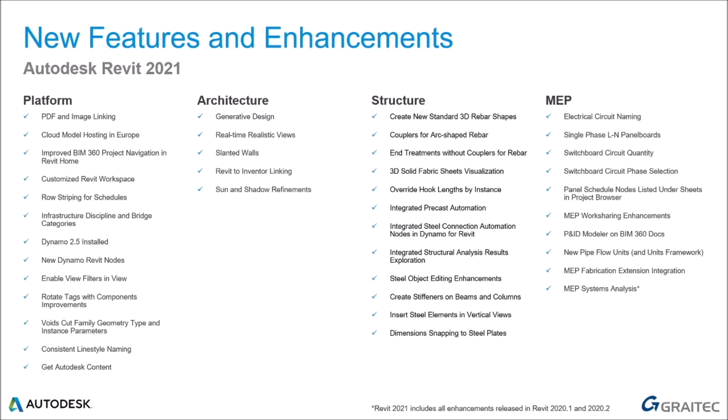Okay, let's get on with the main event. We have quite a list of improvements with Revit 2021, from the basic Revit platform to improve work across all sectors, through to industry-specific enhancements and new features for architects, structural engineers, and MEP engineers alike. Okay, let's take a deeper look.

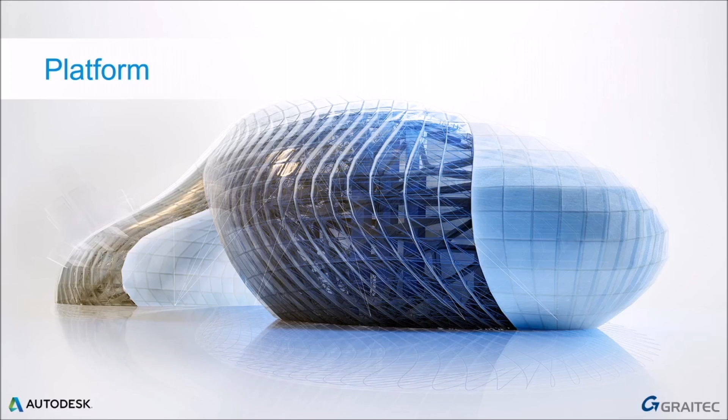First up, the Revit platform itself. What changes are going to be happening across the board that's going to help all of the different sectors?

For starters, we have much better PDF and image linking. We can now link and load images and PDFs in project models locally and from the cloud. Easily keep this information updated while not increasing the file size or embedding the image or PDF file for security or IP reasons. This feature improves sorting, adds size reporting, adds multi-select for unloading, reloading, remove operations, adds the ability to convert links to imports, and adds a show button to find a PDF or image in your model. Bottom line: you can utilize and manage images and PDFs much more easily in Revit 2021 with these new linking features.

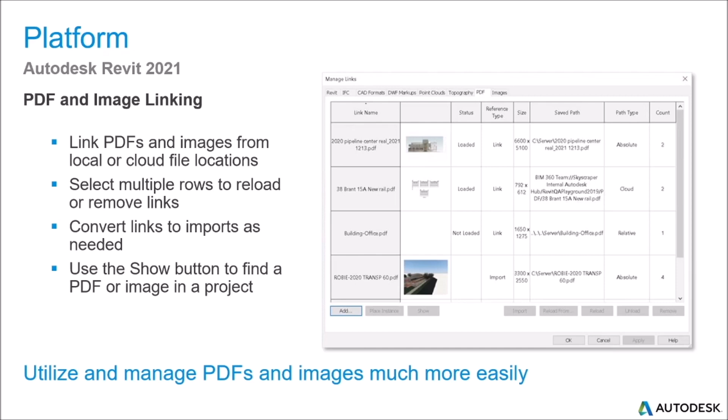For many of us, there's been an issue where a lot of the BIM 360 hosting has been in America versus Europe, but now we've got cloud models that can be hosted successfully in the European data center. This applies to work-shared cloud models using Revit Cloud Worksharing, and non-work-shared cloud models using cloud models simply for Revit itself. So now we have more choice in where our cloud hosted projects are actually stored.

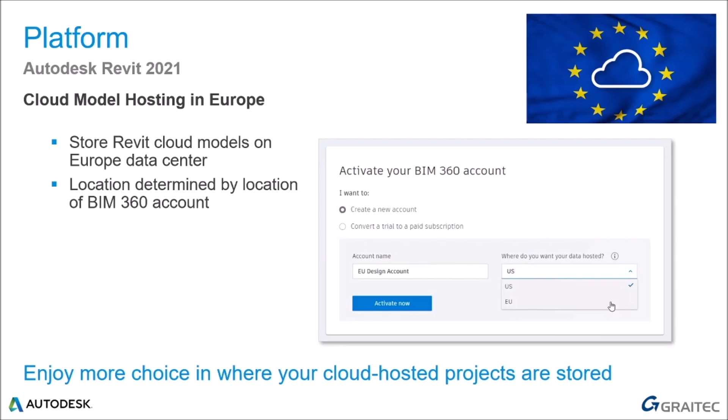More improvements across the platform include the ability to have project navigation actually in the Revit home start screen. Revit 2021 enables a better experience for BIM 360 project navigation in the Revit home screen. It's now easier to differentiate between recent files and cloud-hosted models. The list of projects is now searchable, making it easier to find the desired project. The Go to BIM 360 button is a handy shortcut to access the project on BIM 360 directly, and help links are easily accessed from the bottom left portion of the screen. So the Revit home experience has been significantly improved in Revit 2021 for projects hosted using BIM 360 Design.

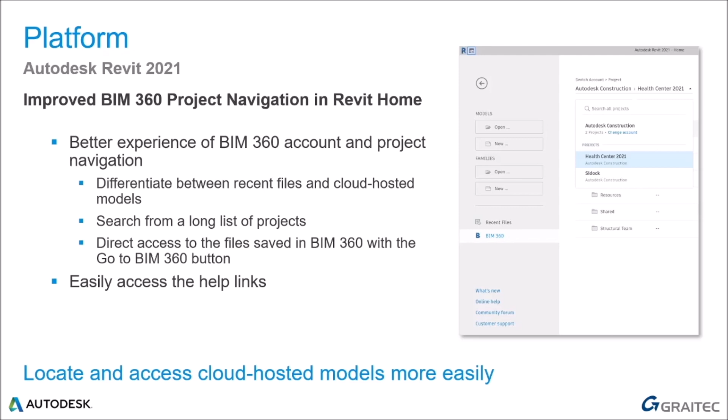We've got some nice enhancements to customize our Revit workspace. For BIM users getting started with Revit, the customized workspace is a user experience improvement that makes multi-discipline tools feel purposefully built. You can now create a user profile that allows Revit to provide a workspace suggestion tailored to your work discipline and job role. This feature takes the first step towards building a customized workspace for Revit users.

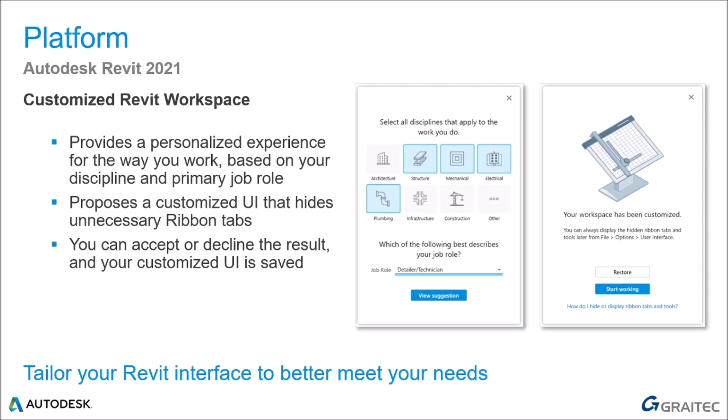Row striping in schedules - looking forward to this one. In Revit 2021, the stripe rows parameter enables you to display alternating schedule rows in contrasting colors, making it much easier to see, especially with larger schedules. Both colors are user selectable for each scheduled view. When you enable stripe rows parameters for a schedule, you'll also have the option to enable show stripe rows on sheets, which will display your selected row colors in sheet views. These settings may be saved in a schedule view template. So this new feature gives us better control over the appearance of our schedules on our actual project sheets.

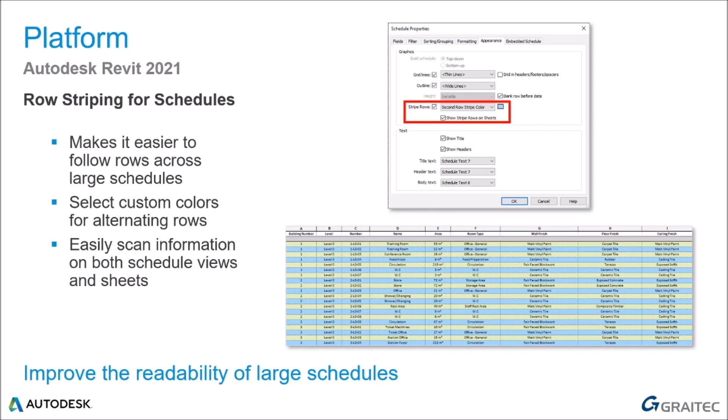To help Revit work with more continuity with other industries, we've now got an infrastructure discipline and bridge categories. Whilst Revit has been an architectural product, on the civils or infrastructure side, this is an area that definitely needs improving. What we have now is some multidisciplinary BIM capabilities for higher quality coordinated drawings, and this extension to Revit's built-in features better supports bridge design features.

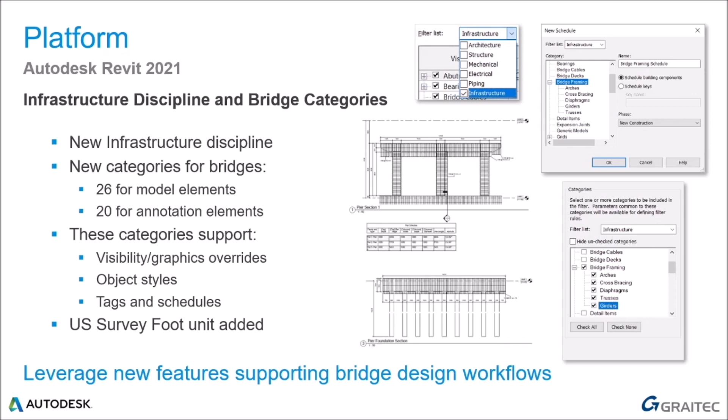A new category filter for infrastructure discipline has been added. Bridge model categories and subcategories, and bridge annotation categories, have also been added to help manage the display of bridge-related elements. Overall, Revit is improving with these features to help us work with the bigger picture.

Dynamo 2.5 has now been installed in Revit 2021. It provides a host of new capabilities. For example, Dynamo now finds required packages in the refreshed workspace references viewer and automatically notifies you if any are missing. That's handy. The viewer lists the packages used in your graph along with their version and status.

In the package manager user interface, the downvote button has been removed to reduce confusion and promote positive reinforcement. The filter icon has been changed to filter by text to improve discoverability.

We've got significant improvements in this area, particularly for large graphs that make changes to the Revit model, and overall run times have been reduced by up to 99%. These and many other enhancements are really going to help the computational design workflow. So if you're well into Dynamo, this is a very welcome change.

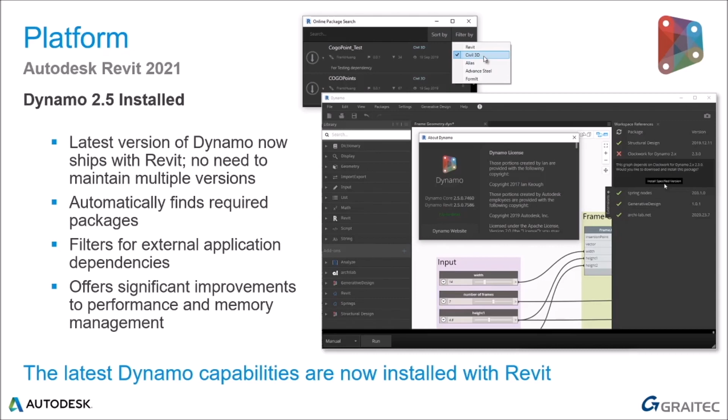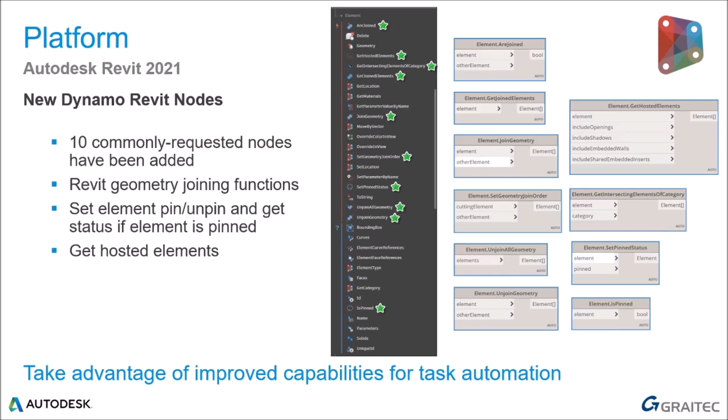Thinking about Dynamo, there are even more nodes that have now been added to support the most commonly requested conditions for geometry joining, pinning and unpinning, and the hosting of Revit elements. These nodes will help users work more productively through Dynamo-driven tasks.

Enable view filters in view. What does this mean? Well, Revit now has the ability to switch on and off filters that you have in any particular view. This is going to make life a lot easier.

It offers us the ability to create a view filter that controls the visibility or graphic display of any particular elements. Using the filter tab in the Visibility Graphics dialog box, these filters can be applied to one or more views in Revit. That's going to make life a lot quicker.

In Revit 2021, this new Enable Filter column that's been added is going to give us the ability to quickly turn on or off overrides of a view filter without having to remove that filter from the actual view. So this new feature gives us the ability to quickly apply or remove view filters from the graphic overrides dialog box.

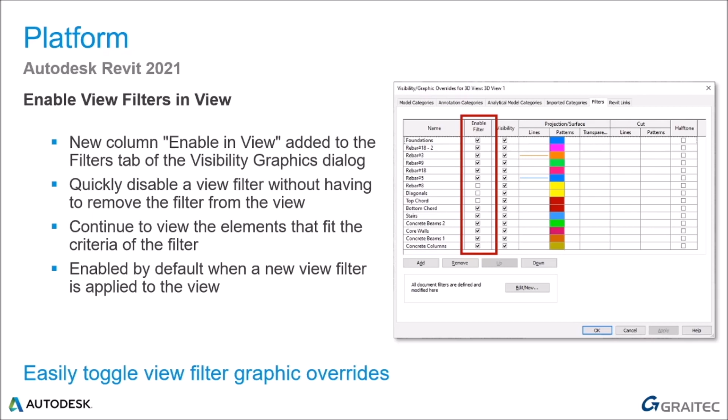Rotating tags with components. This is good. In previous versions of Revit, when you had a tag assigned to a component, it would not rotate when those elements were rotated.

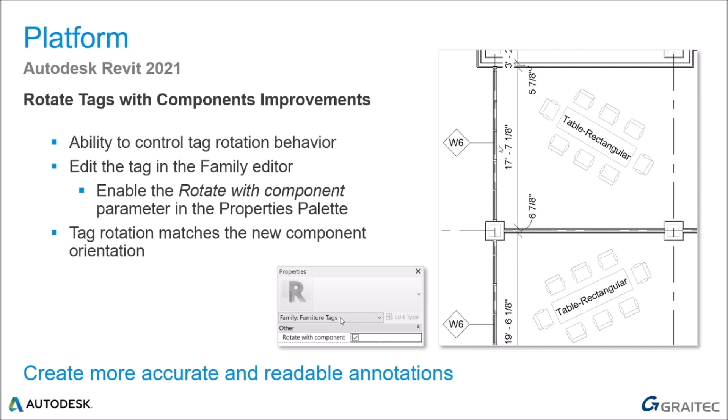Now they'd maintain their original orientation, so we can control this behavior. We can select the tag, open it for editing by clicking the Edit Family button, and enable the Rotate with Component parameter from the Properties palette. This will enable the tag to rotate with the component to which it's been assigned in your documentation. This improvement is going to allow us to create more accurate and more readable annotations.

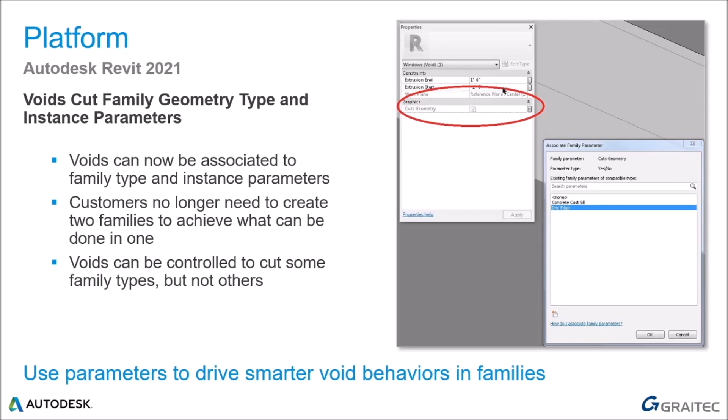Void cuts, family geometry, type and instance parameters. Void cutability can be applied to family geometry by using type and instance parameters. Voids are often used in Revit families and in some cases can define the differences between different types of families. This enhancement will be particularly useful for countertop families that utilize different fixture inserts, or for window families that utilize sills with and without drip edges. This feature provides the user with much better control over void functionality in Revit families.

Very nice. Some other platform improvements: out of the box, the hard-coded line styles are now consistently named and sorted. To lighten the Revit installer, most sample content is no longer installed with Revit. A new Get Autodesk Content button has been added to ensure that customers who do use the sample content have quick and easy access to download this information.

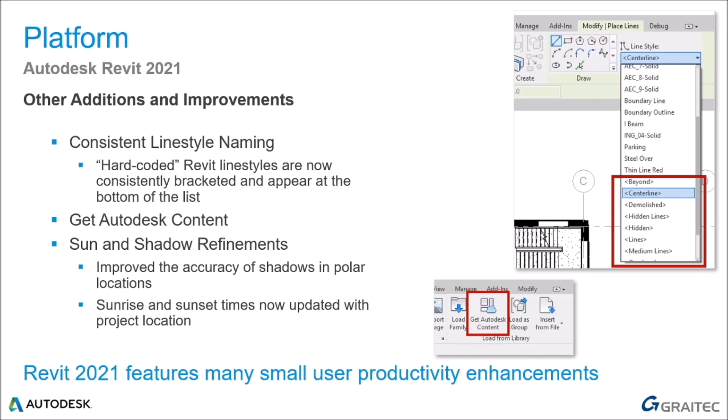Sun and shadows are more accurate in extreme locations, in situations where the sun doesn't set, such as near the North or South Poles. So the Revit 2021 features have many small enhancements intended to address a lot of the customer requests for improved productivity. Now into the industry sector specifics.

For the architectural designers, we have some nice advanced feature improvements and something we've been waiting for quite some time. Let's take a look.

Generative design is a design exploration process to quickly generate and evaluate high-performing design alternatives. Until now, many generative design tools have been hard to use because they required customers to know how to code, understand special terminology, or know how genetic algorithms work.

But now you can use generative design directly in Revit to quickly generate design alternatives based upon your goals, constraints, and inputs. Generative design provides a set of sample study types to demonstrate how this tool can be used to generate outcomes for design challenges. You can easily run one of the predefined studies or recipes with generative design in Revit, such as workspace layout or massing. Let's suppose you want to determine the best arrangement of desks in a large room.

Your goal is to maximize the number of desks while maximizing views to the outside. You may also want to minimize the distance from each desk to the nearest exit.

After generative design has completed a study, you can explore the design alternatives to find the solution that best meets your needs. For each outcome, the parallel coordinate chart highlights its input and output values. You can also use this chart to filter and prioritize outcomes by simply clicking and dragging over one or more columns.

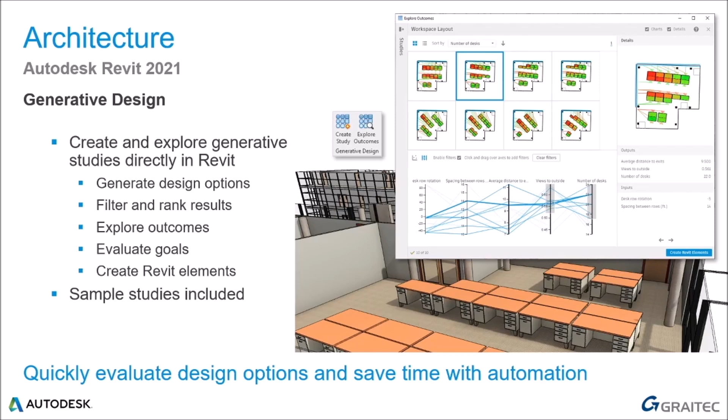Work directly in better, easier and faster live rendered views in the new Revit 2021. This feature replaces realistic views available in past releases. Experience over 10 times faster performance and automatic exposure control. The new mode is available in all types of views and allows direct editing of the model with rendered materials and lights.

Work through a finished model design and modify your building with realistic lighting and materials while you work and place views with materials and lighting onto sheets.

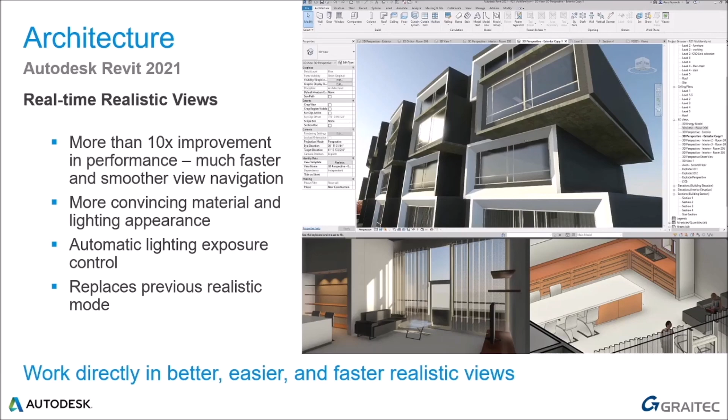Quick note on the hardware - your graphics card needs to have at least 4 GB of memory. So if you're using this feature and you've got a smaller graphics card, you may not want to use this. So real-time rendering is going to allow you to work directly in better, realistic views.

Here it is, slanted walls. We can now apply a slant or a tilt to a wall during their creation by selecting slanted from the new cross-section instance parameter in the constraints section of the properties palette.

You can also change an existing vertical wall to a slanted wall. When the slanted wall option is selected, the angle from the vertical parameter is enabled. Use this parameter to select the inclination of the wall, which can range between plus 90 and minus 90 degrees.

You may also use the editing grips at the top of the wall to adjust its height or angle. Windows and doors hosted in slanted walls will display an additional orientation instance parameter in the constraints section of the properties palette. You may elect to have the hosted element match the angle of the wall by changing this parameter from vertical to slanted.

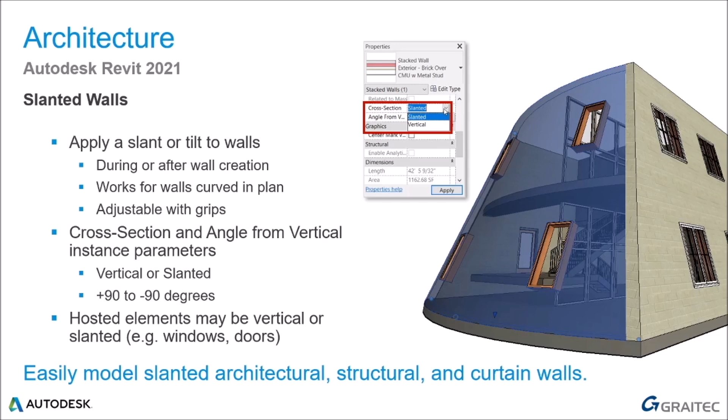You may also create slanted walls from walls that are curved or elliptical in plan. This improvement helps the user create much more complex architecture, structural and curtain walls.

Many of the times we need to work with our actual mechanical engineers who are using products like Inventor. And so now Autodesk Inventor 2021 extends the AnyCAD functionality for Autodesk Revit to help manufacturers in the construction industry collaborate and coordinate on the BIM projects.

There is improved interoperability between Revit and Inventor by maintaining an associative link to the inserted Revit data as you work. The Revit project can be accessed from the local file or coordinated via the cloud using the Autodesk BIM 360 Common Data Environment.

Changes during the design process are inevitable, so when the Revit model changes, you'll need to update the Inventor model to suit. Because the Revit model is referenced into your Inventor assembly, any changes to the Revit project will also update inside the Inventor assembly, without any file translation.

This improved interoperability between Revit and Inventor provides better support for design to fabrication workflows.

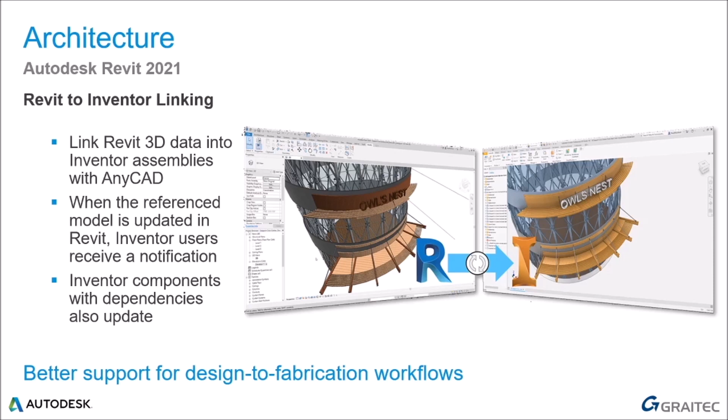Onto the structures. Within the structural sector, it's all about making structures that work, durable enough to withstand what life throws at them for years to come, making sure the reinforcement is up to the job. In Revit 2021, we're going to find a plethora of rebar and steel connection improvements.

First up, the ability to create new standard 3D rebar shapes. Reinforcing bar assemblies, known as standees, are normally required for the support of top mats of reinforcing bars in thick concrete members such as footings and slabs.

These standees have a 3D rebar shape. You can now define such 3D rebar shapes by rotating the hooks at the end of the bars and directly inputting the hook lengths for each rebar instance. Hook rotation is considered when defining a rebar shape.

If included in the rebar shape definition, rebar numbering considers hook rotation along with the other segment length parameters. You can also change hook lengths quickly for each bar in the project. This is accomplished by selecting the Override Hook Lengths option in the Properties palette and inputting the new length in the respective rebar shape parameter field. This is applicable for any rebar with hooks and requires that the hook length be assigned to a rebar shape parameter.

You can also use rebar shapes with 3D hooks inside path reinforcement to distribute rebar standees in your structural projects. Thanks to this new functionality, structural engineers and detailers can now model standardized 3D rebar shapes, extract bending instructions, and provide full fabrication data for the rebar.

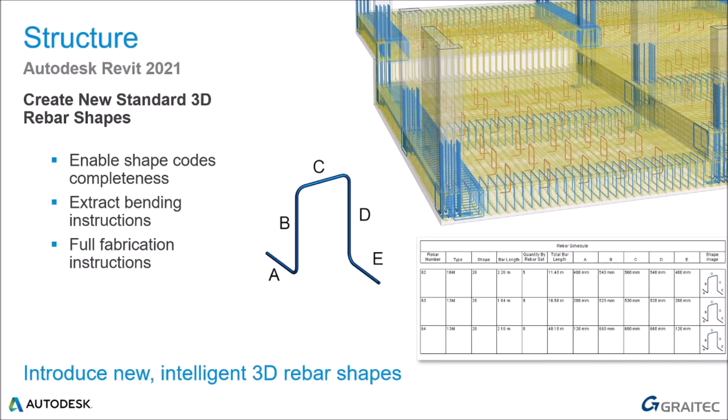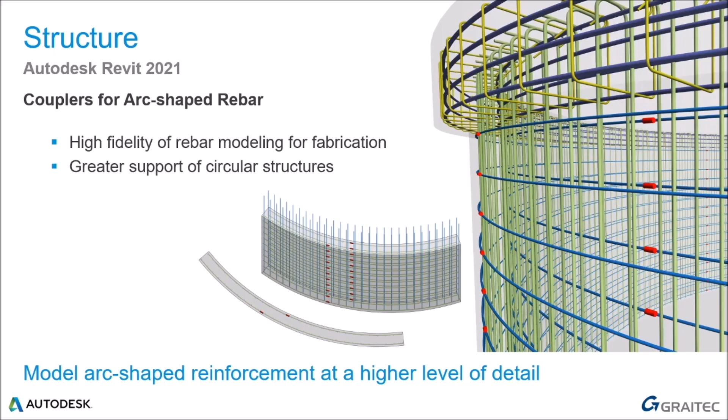More rebar improvements: couplers for arc-shaped rebar. Rebar couplers are used to reinforce concrete structures to replace normal rebar lap joints. You can now use rebar couplers to connect tangent arc-shaped bars in circular concrete structures such as curved walls, concrete tanks, and tunnels, etc. This new feature will allow structural engineers and detailers to create highly detailed reinforcement models and documentation.

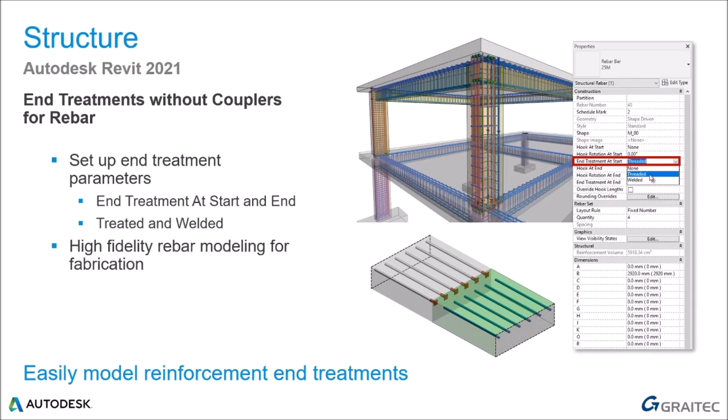End treatments without couplers for rebars. You can now add an end treatment to the end of any rebar without the need for a rebar coupler. Simply select any rebar and change the end treatment at start or end to any of the values defined in the project.

Solid fabric sheet visualization. We can now view fabric sheets and custom fabric sheets in 3D views as solid or unobscured. This feature can be enabled in the same way as for other types of reinforcement, by changing the visibility states, which is available in the Properties palette. When a fabric sheet is selected, the solid or unobscured representation is enabled. This new feature will help structural engineers and detailers improve coordination and reduce clashes through better visualization of the actual reinforcement.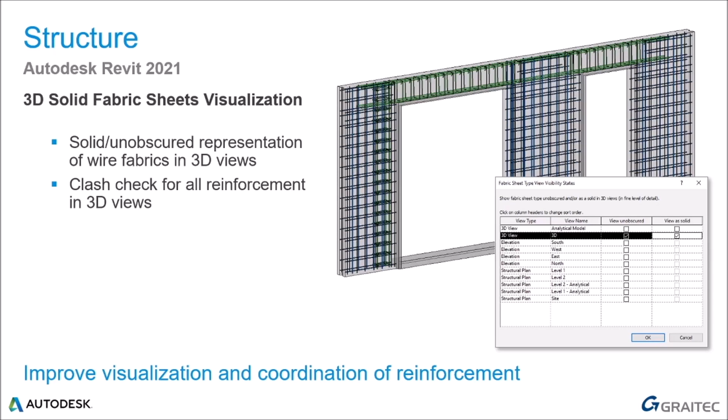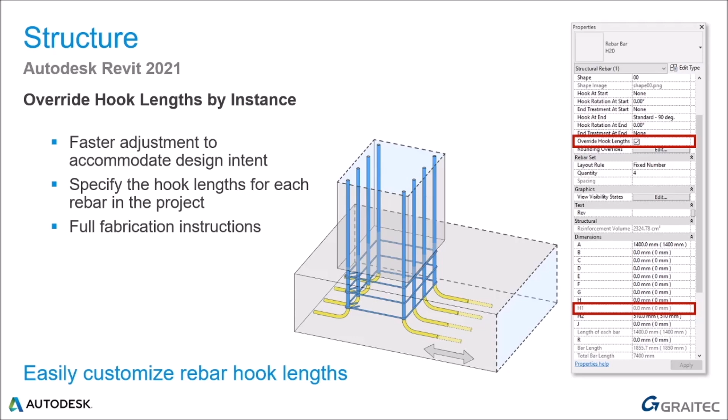Integrated precast automation. The structural precast extension, formerly offered separately for Revit, is now integrated into Revit 2021 with a dedicated precast ribbon tab located next to the Steel tab. These precast features are now included in the Revit installation, simplifying their deployment and making them available in all languages. In addition, the on-off button from the previous release has been replaced with Enable-Disable precast updates. This change helps prevent the automatic recreation of precast elements due to changes performed in the precast assemblies, for example, small indentations of bracing inserts. The integration of this functionality supports multiple stages of the precast workflow, offering advanced tools to automate the process of generating precast assemblies, shop drawings, and files for computer-aided manufacturing CAM machines.

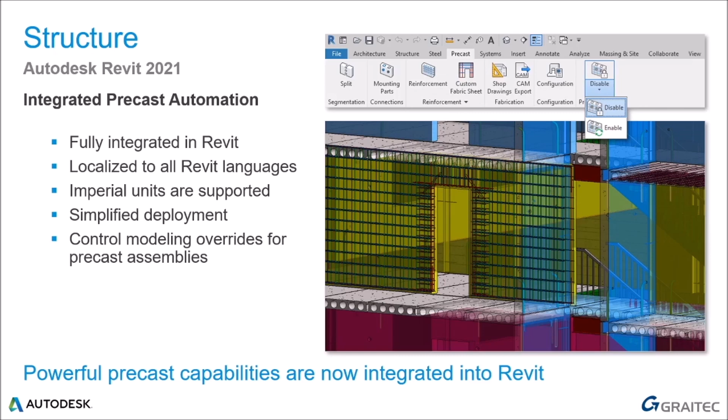So we now have a powerful set of capabilities regarding rebar. Let's move on to the steel side of things: connections and the ability to have automated nodes via Dynamo. The Dynamo nodes dedicated to placing steel connections in Revit are provided with the Revit installation as part of Dynamo for Revit. This means that the functionality previously provided by the Autodesk Steel Connections package, including nodes and sample scripts, will now be available in Dynamo for Revit without additional setup, simplifying deployment and offering an integrated experience inside Dynamo. These nodes give you the functionality to drive steel connections by structural analysis results, tightening the integration between analysis and detailing phases, helping you make better design decisions when adding steel connections to the structural model.

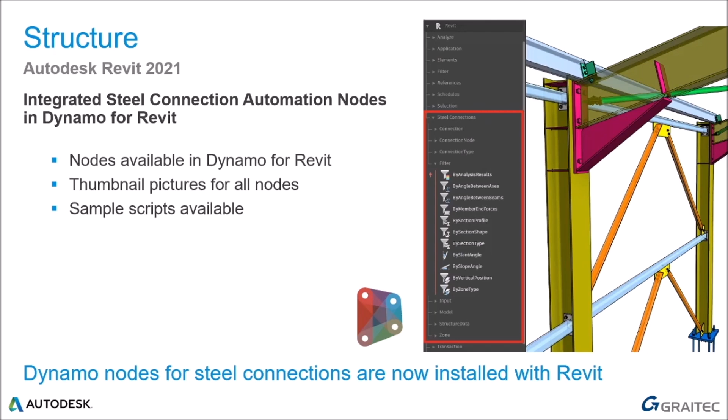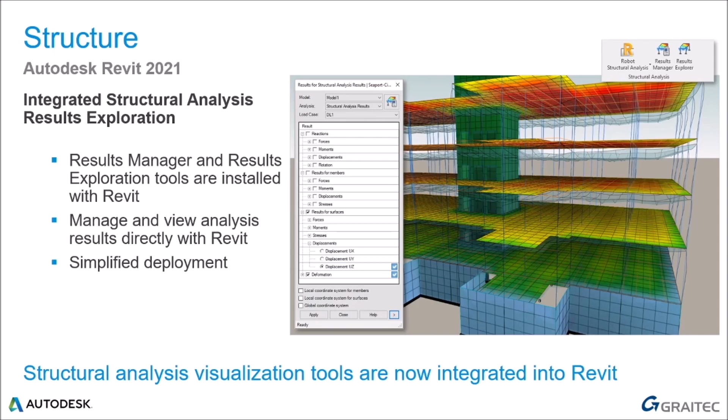The integration of Dynamo nodes for steel connections into Dynamo for Revit provides structural engineers with better out-of-the-box design automation capabilities. The Structural Results Manager and the Results Exploration tools have now been integrated into Revit. These tools enable structural engineers to explore and document analysis results, gain insight into the structure's behavior, and make appropriate design decisions and document them properly. Depending on the type of analysis performed, the results are represented graphically as a map and as diagrams on elements for the analytical model used for analysis.

Steel object editing. The steel detailing capabilities have been extended further to allow more flexibility when modifying steel elements and connections. To change the shape of a plate, simply select it and press Edit Boundary, and then you can stretch one of the plate's edges to the desired location.

To edit simple and complex cuts easily, just select the desired cut using the Tab key, press the Edit Boundary button again, and choose from several options to change the shape of the cut or add, for example, a radius to one of its corners.

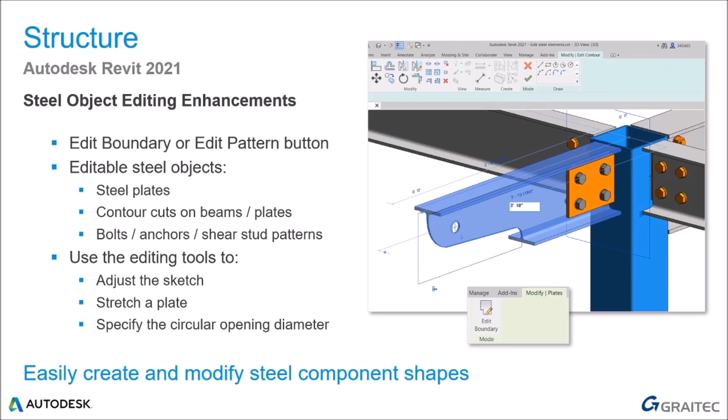The size of circular openings can now be adjusted in a similar fashion. Select the opening, press the Edit Boundary button, and enter the desired new diameter value. This improves the flexibility and efficiency when detailing in Revit.

Stiffeners on beams and columns. Stiffeners are an important component of structural steel design. They're used to strengthen a steel beam or column. A dedicated tool for creating stiffeners is now available in the Structural Connection Settings dialog box.

Once loaded into your project, it is available from the Type selector. You can then insert stiffeners on selected steel members by selecting the insertion point. Like all Revit families, stiffeners have types, meaning you can create a library of different stiffeners. Stiffeners can be moved or copied to a different location along the same beam or to a different one.

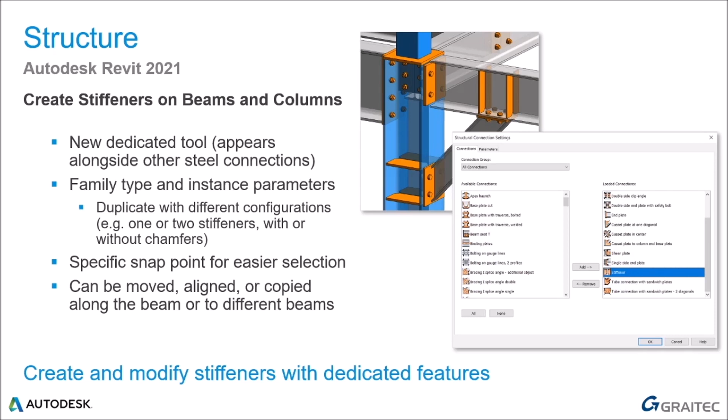This new dedicated tool will help you efficiently add stiffeners and create more accurate steel design models.

Insert steel elements in vertical views. Revit users were previously limited to inserting steel components in just the 3D views and horizontal views, such as levels and floor plans. This limitation has now been removed. Revit users may now place steel components in 2D vertical views.

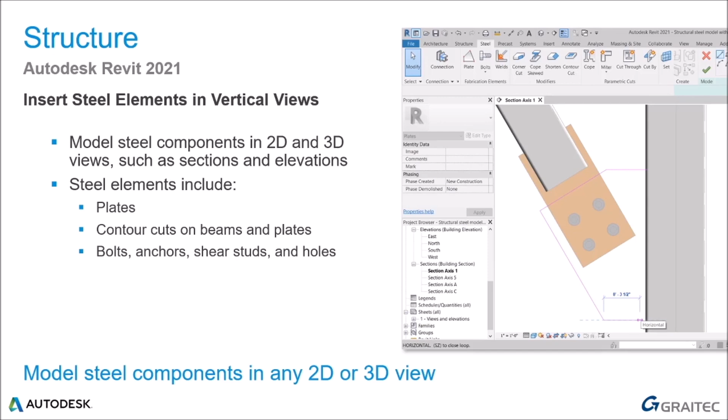For example, a user may insert a steel plate in an elevation view or a vertical section view. This new feature gives you the freedom to model steel components in any view, wherever you prefer to see, create, and adjust them. So now you can work with steel components simultaneously in 2D and 3D views.

Dimension snapping to steel plates. When creating engineering drawings for steel connections, you may wish to create dimensions to the center of the plate for more accuracy. In addition to creating edge distances for a steel plate, it's now possible to snap to its midpoint and create dimensions indicating the distance from the plate edge to its center, both vertically and horizontally. For stiffeners and connection plates along a beam, improvements have been made that enable you to dimension them from center to center with a dimension to a center line of the beam web.

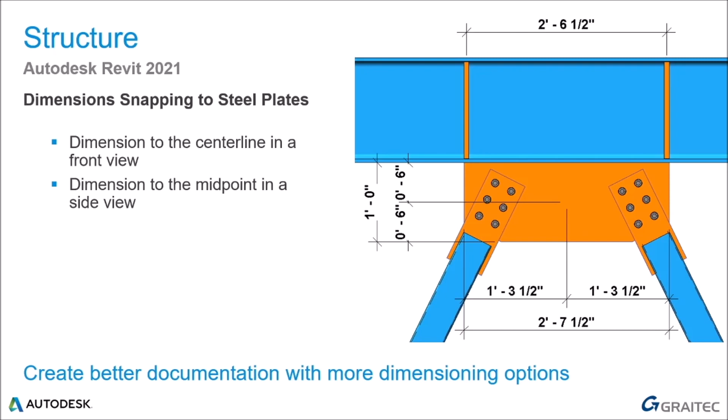Because these dimensions are parametric, if you move these stiffeners, the values of the dimensions between them will update automatically. This feature is going to certainly help create more accurate and readable engineering drawings.

And now for the mechanical, electrical and piping engineers, we have a deeper set of tools and controls to get those systems better integrated, analyzed, and built to fit the built environment to work.

Looking at electrical circuits, there's a parameter list on each of the panels. In electrical settings, there is now a new node called circuit naming. The circuit naming schemes created here show up as options in the circuit naming parameter list on each panel. You can select a scheme for the project that is used for all panels that have their circuit naming value set to by project settings.

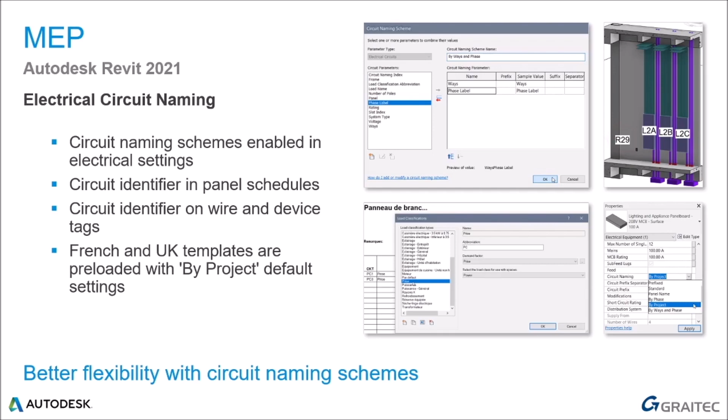Using this, Revit is more adaptable to the global market, and we're able to provide a more flexible method to define circuit naming schemes.

Power phases. Revit now supports showing a single bus column in the panel schedule templates that only show single phase. Loads on a single phase L-N panel will all be connected to a single phase. With this enhancement, when selecting a distribution system to assign to a panel, Revit will check the voltage and the poles assigned to the connectors and filter out any distribution systems that don't match.

All LN panel loads are on a single phase, and the phase total loads tabulate accordingly. The panel schedule will show the loads on the phase defined by what phase it is connected to on the panel that it is fed from.

Now, schedules that use the hide column for third phase option will hide columns for all unused phases, and this will be applied automatically during upgrade. This option text has also been revised to reflect this new behavior.

After upgrading, if a model already has circuits connected to mismatched panels, the circuit connections will be kept. Then, if a user continues to assign circuits after upgrade, a warning displays to let the user know of a mismatched scenario. This enhancement in Revit now properly supports single phase, one pole, one hot conductor LN panel boards.

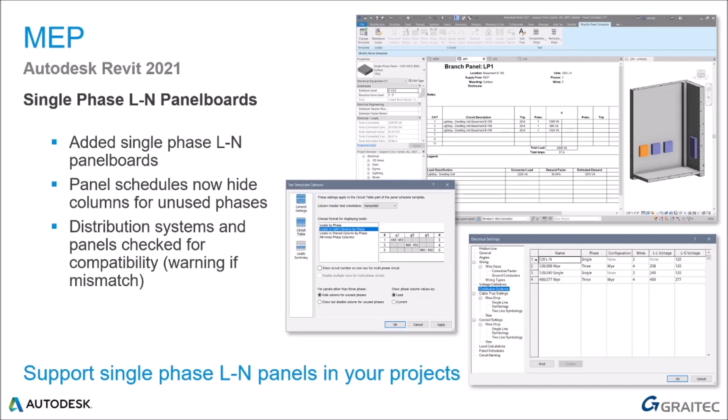Switchboard circuit quantity. Switchboards no longer report a value for the max one pole breaker parameter in the schedules and view filters, as the max number of circuits parameter is used instead.

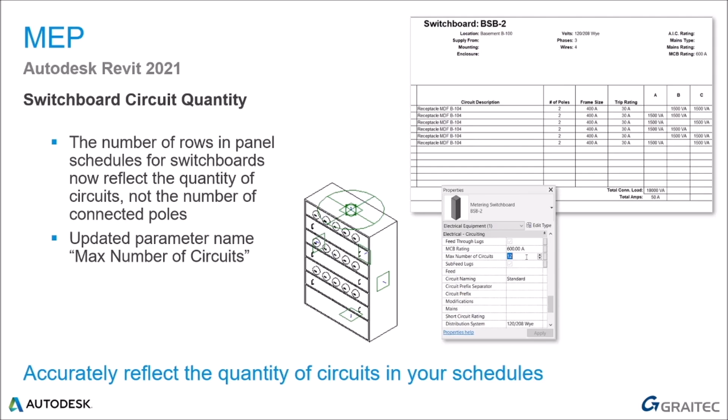Also, there is a new family parameter in the electrical equipment part types for the switchboard. This means that switchboard schedules now show the quantity of circuits rather than the number of connected poles.

Switchboard circuit phase selection. Prior to this enhancement, 1 and 2 pole circuits are always connected to phase A when connected to the switchboard, making it not possible for the user to specify what phase a load is connected to. This new release of Revit, a new switch phases command has been added when selecting a circuit in the switchboard panel schedule view.

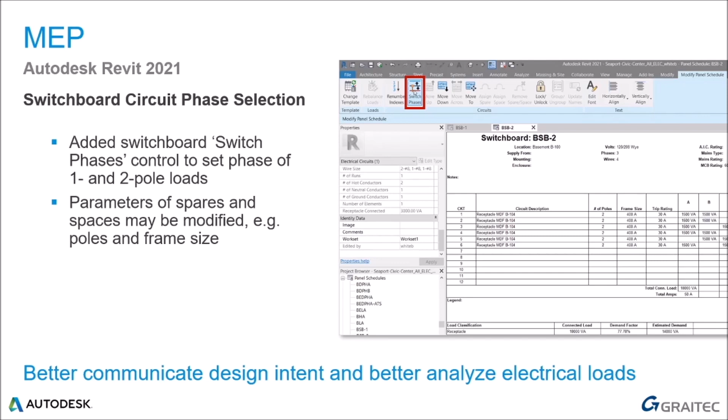Additionally, it is now possible to modify parameters of the spares and spaces, such as poles and frame size. The project browser now lists panel schedules under the sheets on which they are placed.

This improves consistency with other features of the project browser and helps users more quickly navigate their project to get the information they need. They're also searchable within the project browser.

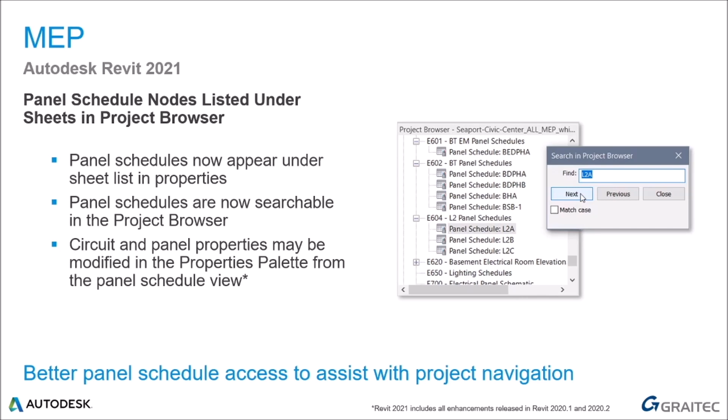Also, part of the 2020.2 release was making it possible to modify properties of circuits and panels in the Properties palette from within the Panel Schedule view, making it easier and quicker to make modifications to these components without having to switch views. This addition provides electrical designers with faster and more consistent navigation for panel schedules.

MEP work sharing enhancements, using the work sharing display to compare the legacy and the new behavior. Previously, all indirectly modified elements are borrowed. Now it's only the directly modified elements that are borrowed.

To resolve work sharing issues, the auto heal behavior for inline elements was disabled. Understanding of the trade-off for having the undesirable behaviors removed versus being in control of exactly what happens is beneficial.

These improvements will help MEP professionals to collaborate more effectively when using work sharing.

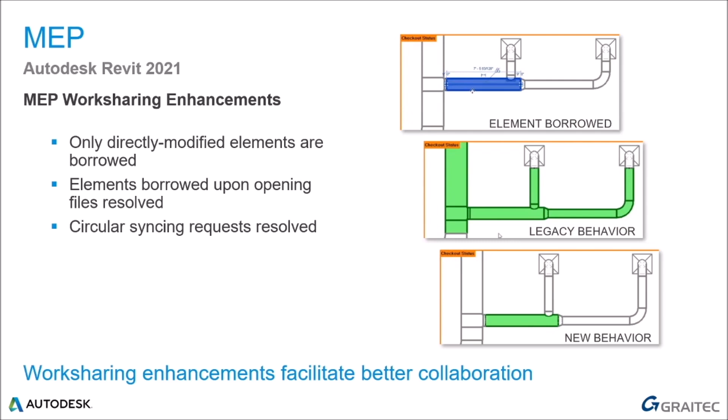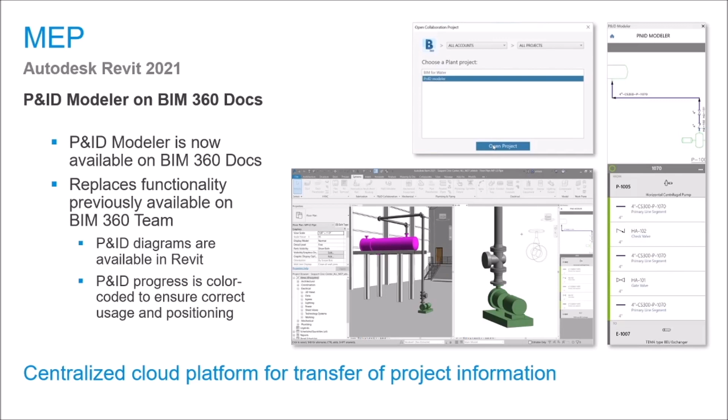So the bottom line here is that the P&ID modeler for Revit is now hosted on BIM 360 docs.

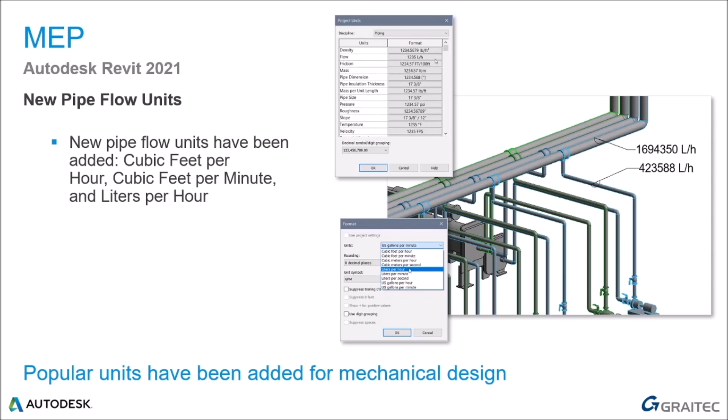New pipe flow units. Revit now supports cubic feet per hour, cubic feet per minute, and liters per hour as units for pipe flow. This addresses a popular customer request and has been added to better serve the mechanical designers.

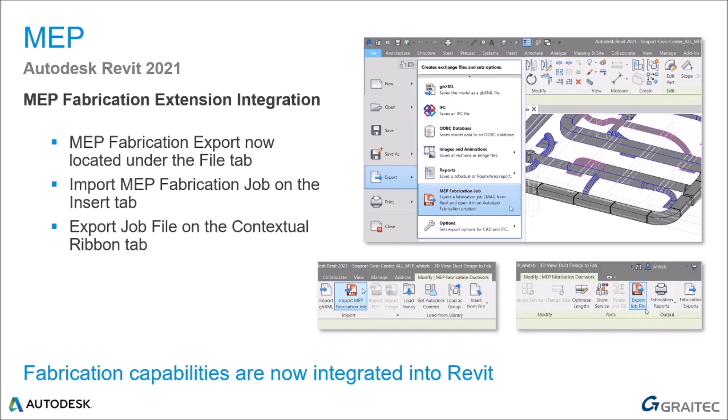MEP fabrication extension integration. The import and export features are now located in standardized menu locations, and output tools have been relocated from the Add-ins tab to the contextual menu that appears upon selection of an MEP fabrication part. MEP Fabrication Export is also located under the File tab Export menu.

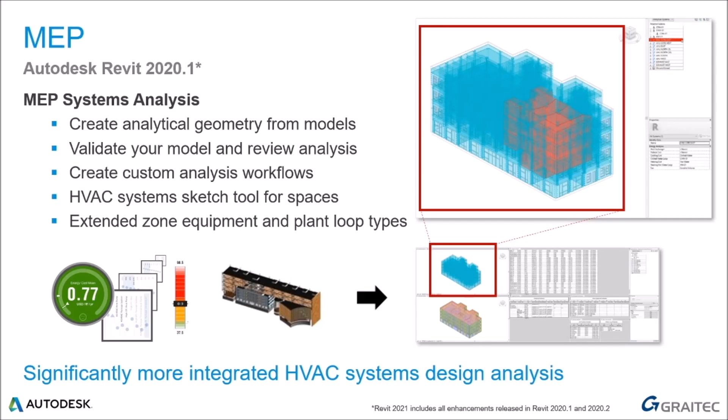And when all the analysis is complete, designers can explore their reports in graphical and tabular forms. With Revit Systems Analysis, enjoy integrated HVAC analysis and modeling, and better building designs and performance.

And that's a wrap. So that was what's new in 2021. I hope you found some of it interesting and inspiring so that you can start to play with some of these new features in Revit 2021 and grab it as soon as it appears in your Autodesk account.